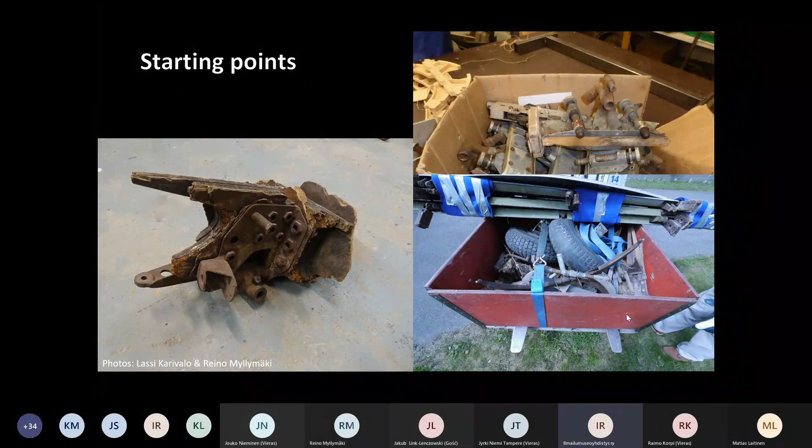All wooden parts and all smaller metal parts had to be completely rebuilt from new materials. Since autumn 2015 till autumn 2017, the Tuesday Club made hardly anything else but components to build the new wing and the spars. The leading edge, center, and trailing edge parts of the wing were made from plywood planks by the Pro Laser company. So there was quite a lot of work and many more parts to be done.

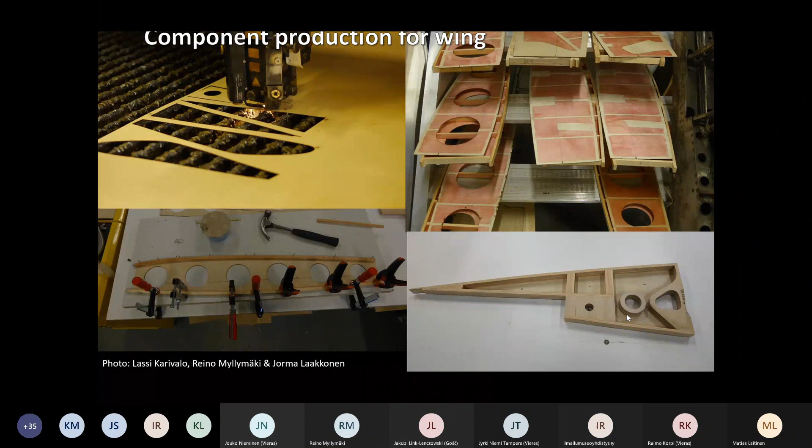The component production for the wing started after most of the parts had been done, mostly at the same time, so that the parts would be ready for assembly.

There were 3 webs on the Myrsky box in the wing. The webs are made of birch plywood. The upper cap is laminated birch veneer, and the lower cap is pine, laminated by veneer lumber.

The whole wing is 11 meters long, and it was made by our Tuesday Club and Matti in 2 parts, which are easy to move after the aircraft is finished. So the main change on this part was that the wing is not going to be one piece 11 meters long. It will be in 2 separate parts, which will help us and the museum staff later with transportation and moving the aircraft from museum to museum or other exhibitions.

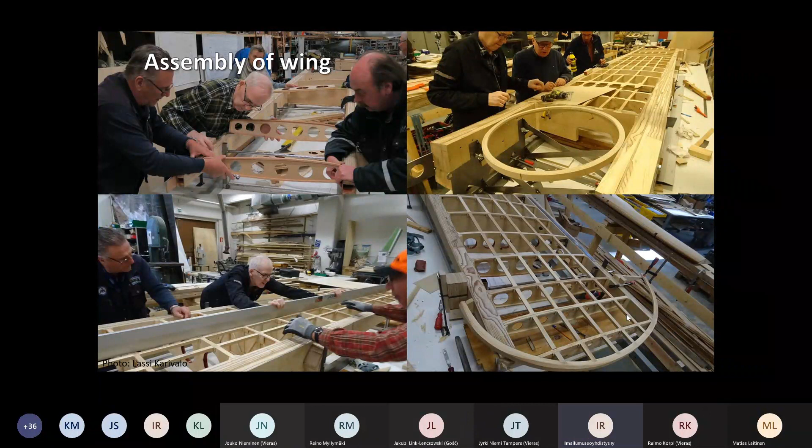Covering the wing with plywood, starting from the middle section and the lower side of it.

After the lower part was covered, the wing was stiff enough to be unfastened from the jig. Then the other wing had to be assembled to the jig, and we continued to do the same for the second wing part as we did for the first. So first one wing and then the other, same working process.

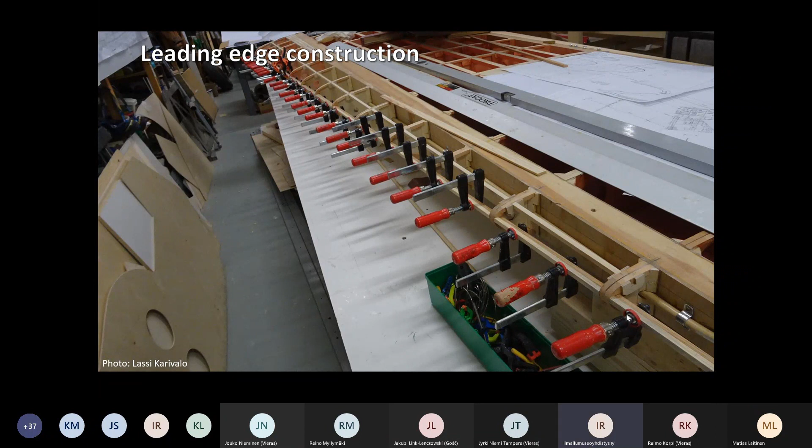Trailing edge construction. Building the trailing edge was more complicated. The ailerons and the flaps are located in the trailing edge, so we needed quite a lot of installations to be done and quite a lot of different kinds of measurement checking.

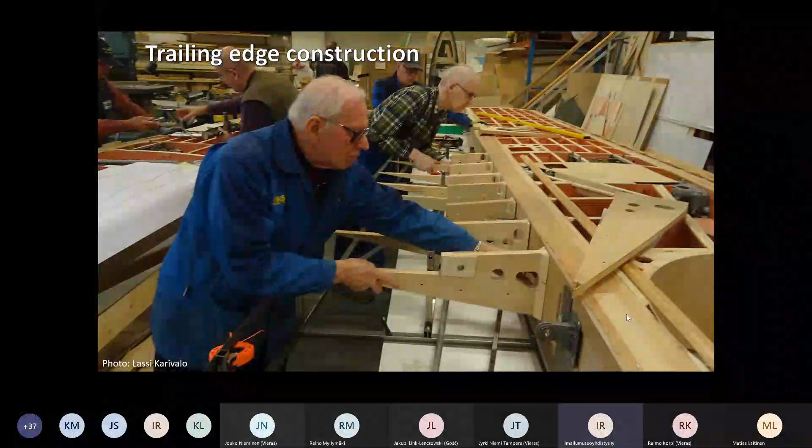We also used original flaps, but they were not quite as millimeter-tight as the drawings, so Matti and the guys needed to do some replanning for how the original parts would fit our wing parts.

We also have a test wing that we can show museum guests, to display what kind of structure is inside. It will be covered by plastic, but the real plane and the museum plane will be covered by plywood, so everything we have done inside the wing will not be seen.

There are, and will be, original parts like the flaps, moving parts, and other original parts, mainly metal. There is also the landing gear, flaps, ailerons, and many other technical things inside the wing, but we won't be able to see them once the plane is finished.

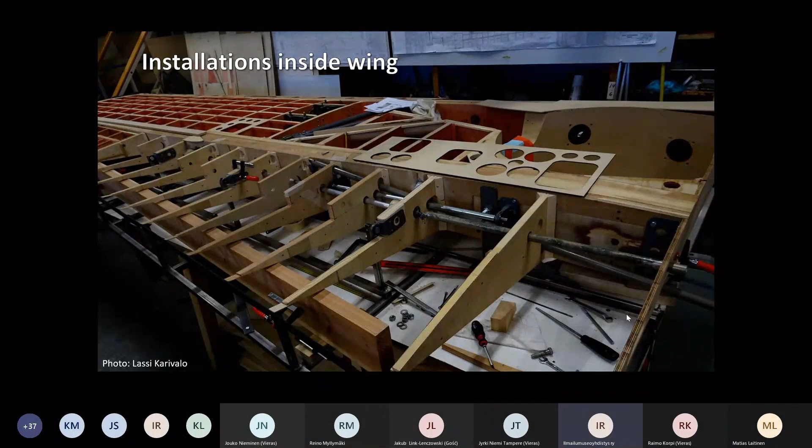All the wooden parts were made by the Tuesday Club, and almost all the metal parts are original. Some parts needed to be remade because the original was too damaged, or because we don't have the original parts left.

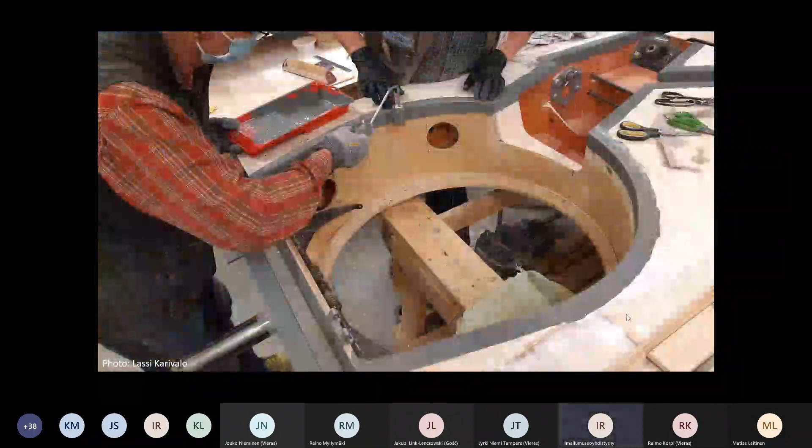When the plywood covering was ready, the primer work started. Strengthening fabric strips are fastened to the edge of the wheel by applying primer with a smaller roll. So every part where one plywood meets the next plywood, we put fabric and primer on the plane to avoid moisture reaching the plywood.

Here is some part of the landing gear. Some of the landing gear parts were original, like you see on Matti's hand, the upper part, and some of the parts were made after as new parts, like this lower part in the photo. So you see there are some original parts and some new parts that our aircraft company Patria and other places have made for our project.

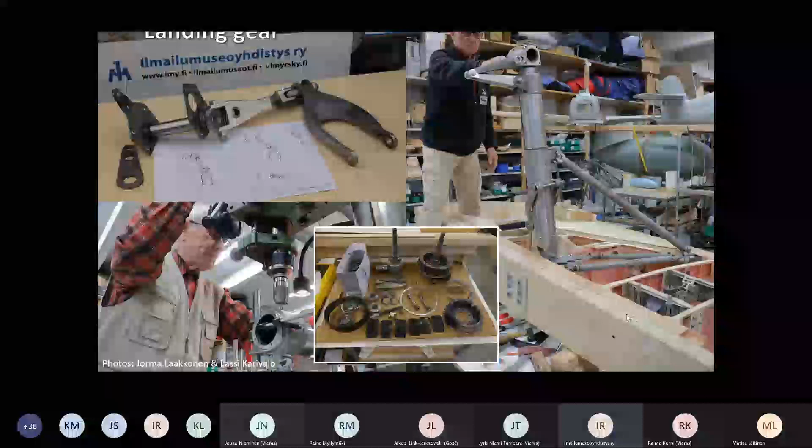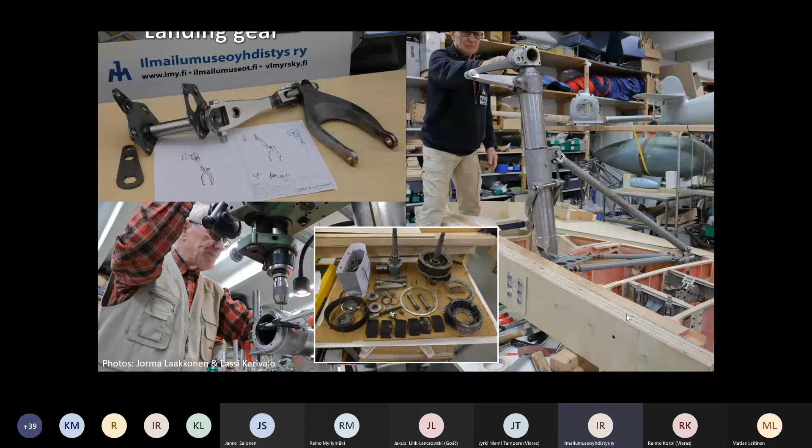For the original landing gear, almost all the mechanisms were missing and only some wheels and some smaller parts were left. There were no drawings left, so Matti first had to make drawings and then manufacture the materials after the drawing work. Matti had to do quite a lot of engineering work just from photos, trying to find how other planes had done it, and the result was a nicely working landing gear.

Landing gear doors. The landing gear doors consist of several parts. The door which moves with the strut has two sections so that movement is possible. The door system also has the inner landing gear door and strut bracing door. When the landing gear is retracted, the doors form a smooth surface to the underside of the wing.

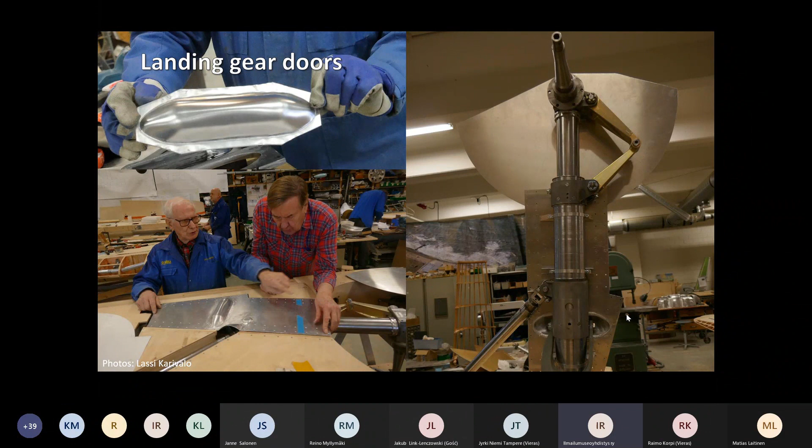Tail assembly. The tail plane had to be rebuilt from new material because only some original brackets, hinge brackets, trim plates, and the metal elevators were available.

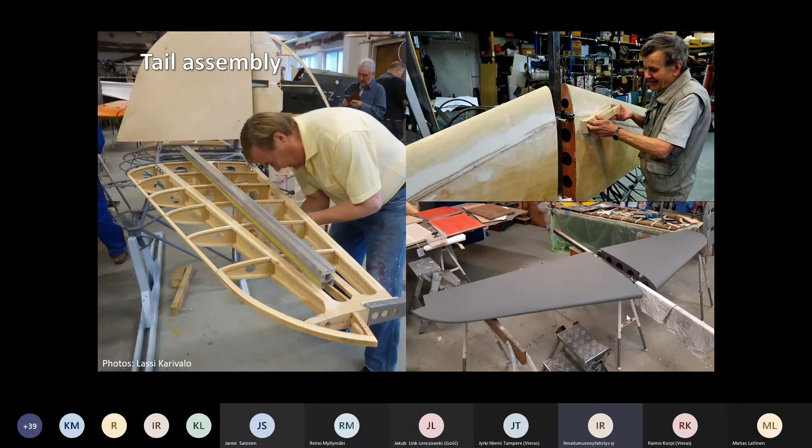The inner structures of the vertical stabilizer and the rudder were completed at Matti Patteri's home workshop already in 2013, before the big project started. The inner structures of the horizontal stabilizer were ready before summer 2015. So the tail parts were the first parts the project completed, and they have been ready the longest since the project start.

NACA ring. Probably the most difficult missing piece of the project was the NACA ring. It is made of thin metal, and it's not known how it was originally made. The lower part of the NACA ring has the shape of a body of revolution. The upper part has holes for the carburetor air intake and for four heavy machine guns.

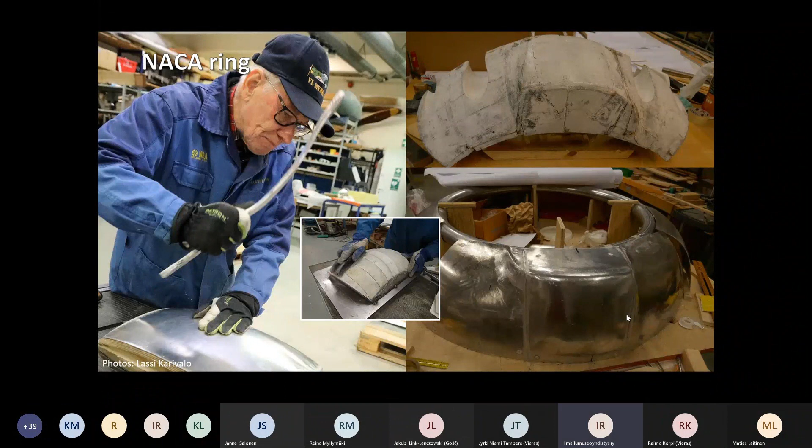So getting the NACA ring done is more or less complete, made of several parts, because we don't have drawings to show how it was done originally. Here is the NACA ring today, and you see the carburetor air intake, and you see the machine gun placements.

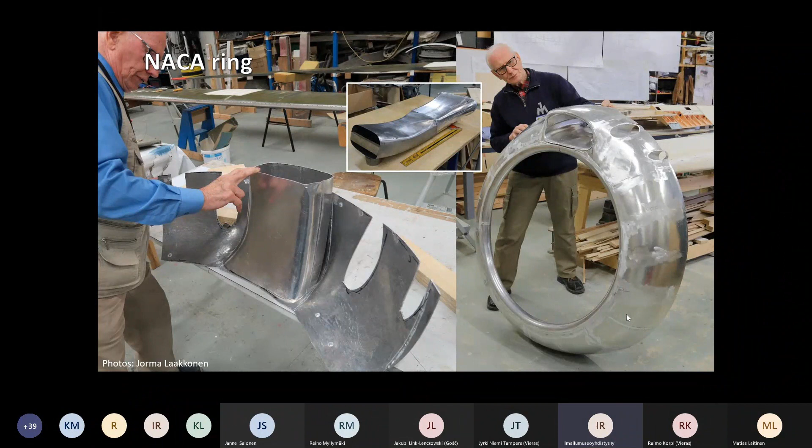Next in the presentation, we go to the restoration team of the Finnish Air Force Museum, and I will try to tell you how they have done their part in Tikkakoski Air Force Museum.

The starting point of the project on their side was 3 Myrsky fuselage frames available for this project. The best condition was chosen as the starting point for restoration work, and that was the Myrsky 14 fuselage, shown in this photo. However, the frame had been badly damaged in an accident in 1947, when another aircraft taxied into the plane from behind in Pori.

The fuselage was broken in front of the tailplane, and the tail disappeared over the years. All 3 fuselage frames had a number of small parts still attached in different conditions. Even the wooden antenna mast, which can be seen in the picture, could be restored.

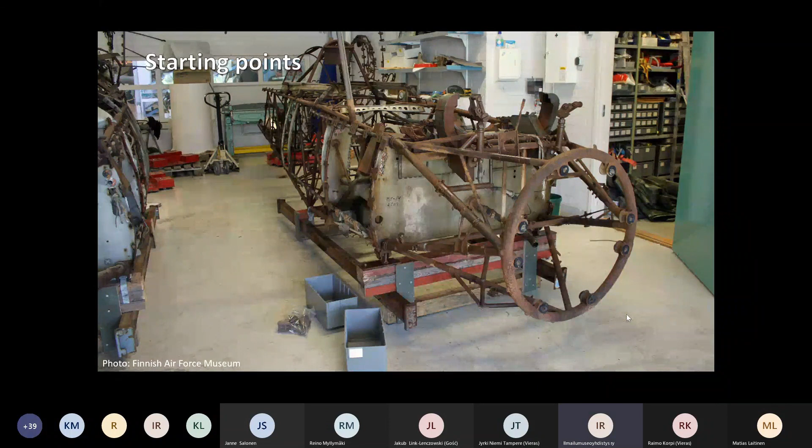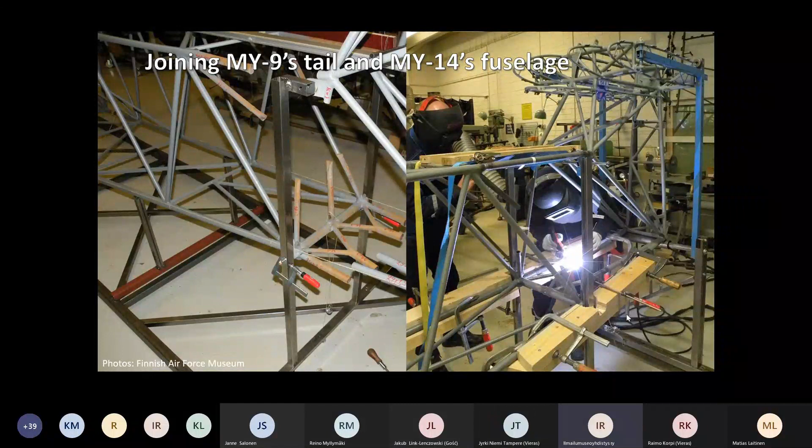Joining Myrsky 9 tail and Myrsky 14 fuselage. At an early stage, the tailplane was disassembled from Myrsky 9 and assembled to the Myrsky 14 fuselage. The welding work was done by the aircraft welder from Patria, Mr. Rauno Pylväläinen.

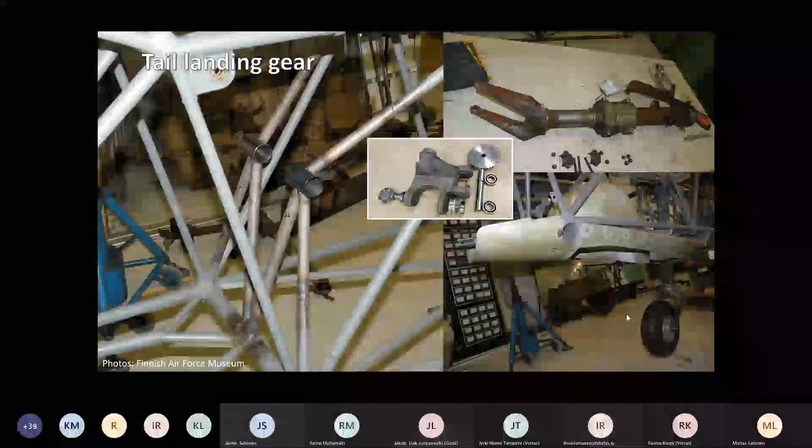Cockpit. The cockpit can mainly be built from original parts, which naturally need repair. The back part of the armored seat is from a Fokker D.XXI fighter, where a similar back armor plate, probably made in Sweden, was used. The seat part had to be made entirely from new material.

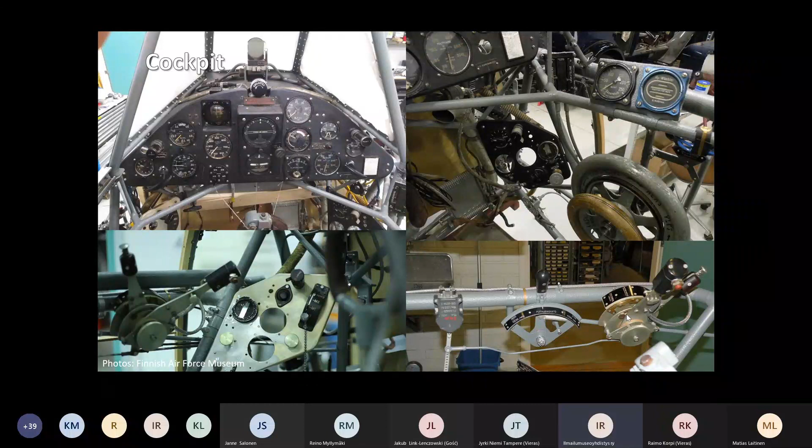Cockpit continues. The cockpit is mainly built of repaired original parts, but additional instrument panels have been made. So some of the panels are original, and some of the parts have been made from new material.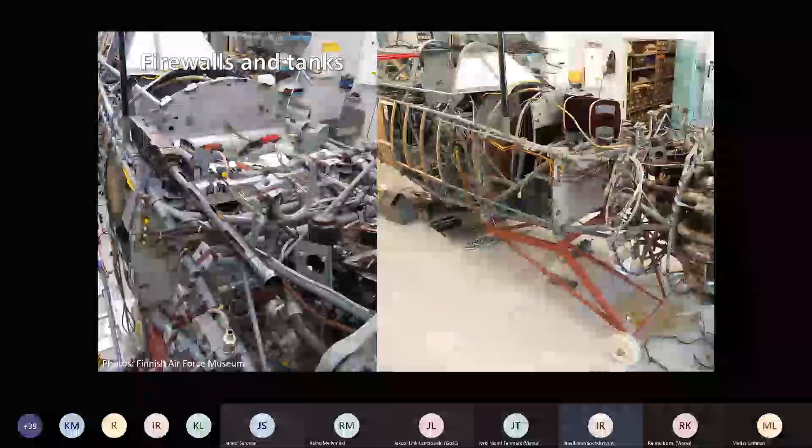Firewalls and tanks. There are some original parts in the firewall assembly, but new parts were also needed. When the original parts and their remains were compared to the drawings, it was noticed that many changes had been made during manufacturing and not documented. The oil and fuel tanks are still missing and haven't been made yet. The molds which can be seen in the pictures are needed for pipe installations.

Weapon system. The Myrsky's all 4 heavy machine guns are located in the nose of the aircraft. 4 guns are available, and a large number of carriage and feed ducts and other mechanisms can be original parts, but the ammunition boxes are missing.

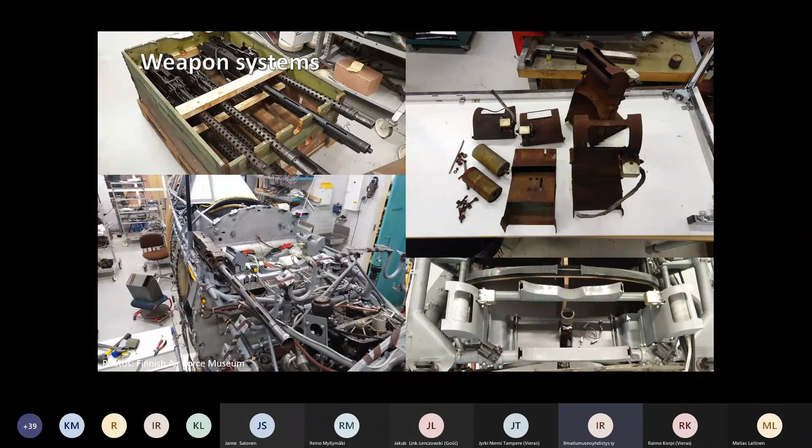Engine. The Myrsky's engine was eventually chosen from the Finnish Air Force Museum display. The engine has ordinarily been used on DC-3 aircraft. The engine bulkhead was made by Antero Flander. Also, the complicated exhaust pipe arrangement had to be made - its ejectors which produce thrust. The ejector ducts were made by Tuesday Club, and the demanding welding work was done by Rauno Pylväläinen.

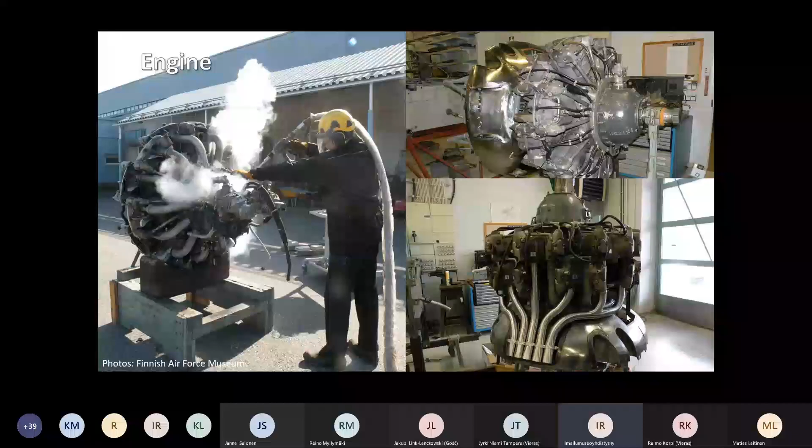Oil and fuel pipelines. The lubricant oil and fuel pipelines were mainly assembled from original parts, or parts resembling the original ones.

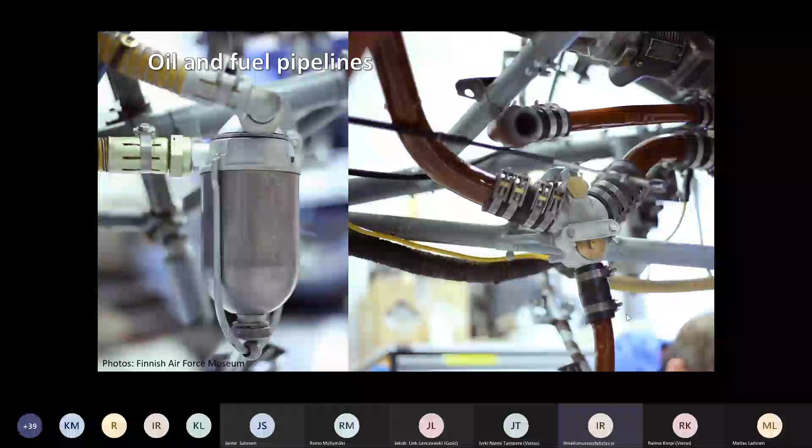Electrical systems. The fighter aircraft from the 1940s doesn't have a lot of equipment which uses electricity, but there is still quite a lot of work in the electrical systems. The connection box for the landing gear motor has been built from original parts collected from several sources. The power cabling is built from fabric covered cable bought from Germany, and the cable sleeves are aluminium socks from the 1950s to 1980s.

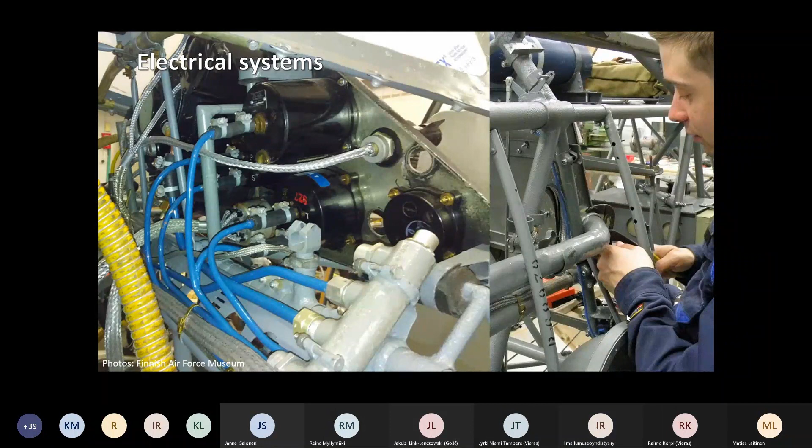Fuselage formers and hatches. The wooden fuselage formers have been made by Tuesday Club, including the upper formers. The upper and lower formers are components which have been made on a jig, and some fitting is needed in assembly work.

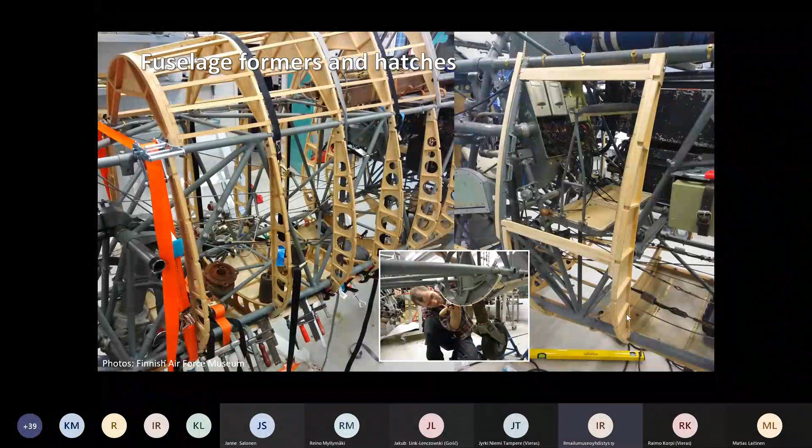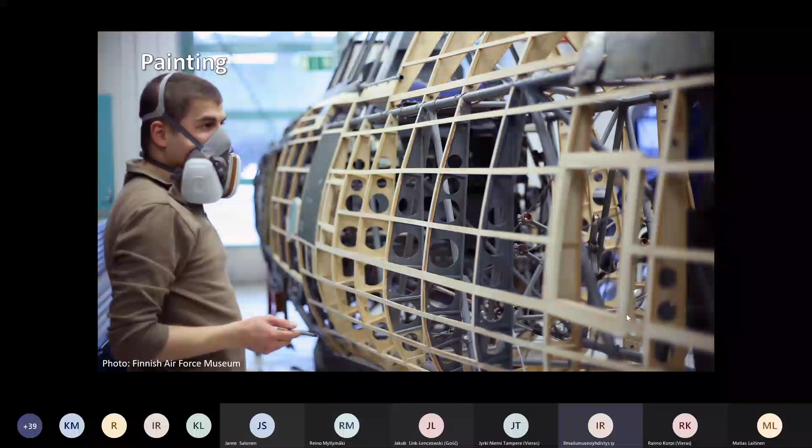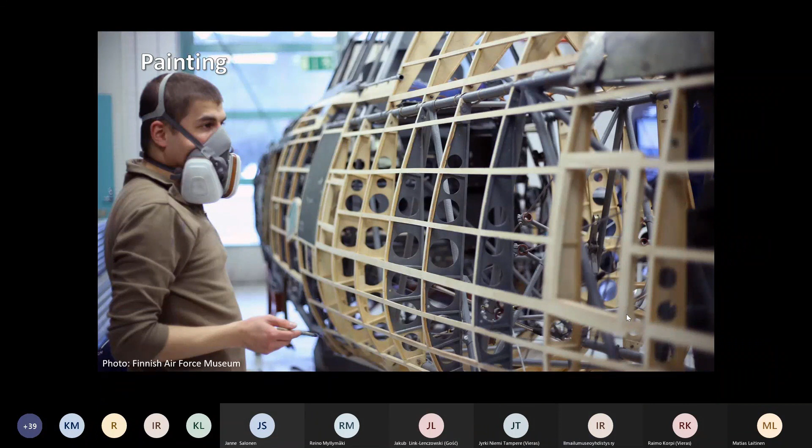Painting. The wooden parts of the fuselage will be painted grey on the inside. The inner side of the wing is red because of the marker color added in the varnish. The wing roofs will also be painted grey on the inside. For the painting work, the original parts and their methods of work have been investigated. The original paints will be modified with Teknos to the extended production range.

Now the wing is ready for the roofing, and we had on March 3rd this year a roofing celebration when we celebrated that the wing parts have now been roofed.

COVID-19 and Myrsky. After the roofing celebration, the COVID pandemic interrupted the restoration work on March 17, 2020. However, after 2 weeks, work could be continued. The Tuesday Club continued work on the critical parts with a small task force.